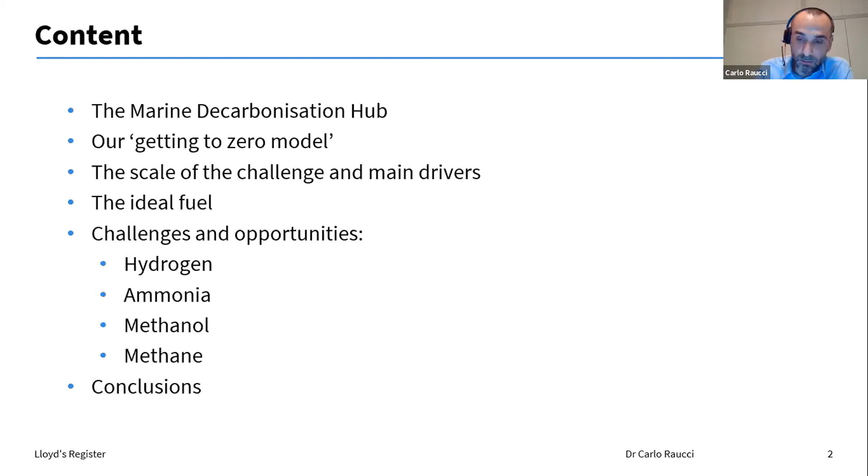The Lloyd's Register Maritime Decarbonization Hub has a clear mission. We want to accelerate the sustainable decarbonization of the maritime sector to deliver safe, technically feasible, and commercially viable zero-emission shipping by 2030.

And we want to do this, so we set some objectives. We will identify and enable a sustainable transition. We want to put in place a safety standard that will enable a safe transition. We also aim to build partnerships with first movers to innovate and demonstrate the route to scale. We want to build capacity for safe design and operation of zero-emission vessels. And finally, we also want to provide the right tools to enable decision-making.

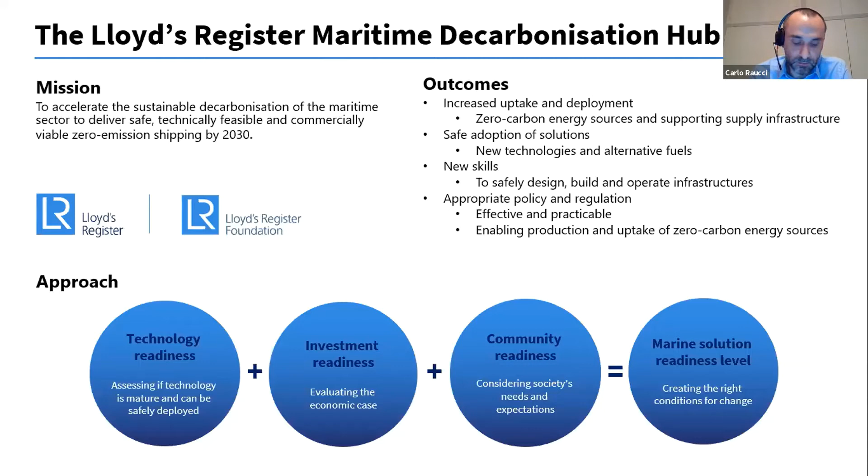In order to do so, we have established our own approach, which you can see in this diagram, composed of 3 elements in order to assess the marine solution readiness level. We aim to do this by assessing the technology readiness, the investment readiness, and the community readiness. We have actually translated this approach into a tool, which we call our Getting to Zero model.

The overall readiness, as you can see, we can put this diagram in a slightly different way to highlight the fact that the overall readiness of a solution is actually a combination of technology, community, and investment readiness. We aim to track the readiness of different technologies in order to assess the readiness of a solution. This model essentially can identify the bottlenecks of a marine decarbonization solution. We use this tool in the hub in order to focus our activities to progress the overall readiness of a solution.

So just to give a practical example: if we have a fuel that is technology mature, and there is a good business case, but actually a lack of safety standard for marine application, well, we are going to put our effort into establishing a safety standard in order to progress the overall readiness of such a fuel. So this is us, this is how we operate.

Now let's talk about decarbonization and understanding the full decarbonization of the shipping industry. As I said, this is very strongly connected to the question of why we need new fuels. Let's start with this graph, which shows essentially a potential decarbonization trajectory, with full decarbonization by 2050 or by 2070. In this representation, we also have highlighted the IMO ambition, which is the most important ambition of the IMO's initial strategy, aiming to reduce annual GHG emissions by at least 50% by 2050 compared to 2008.

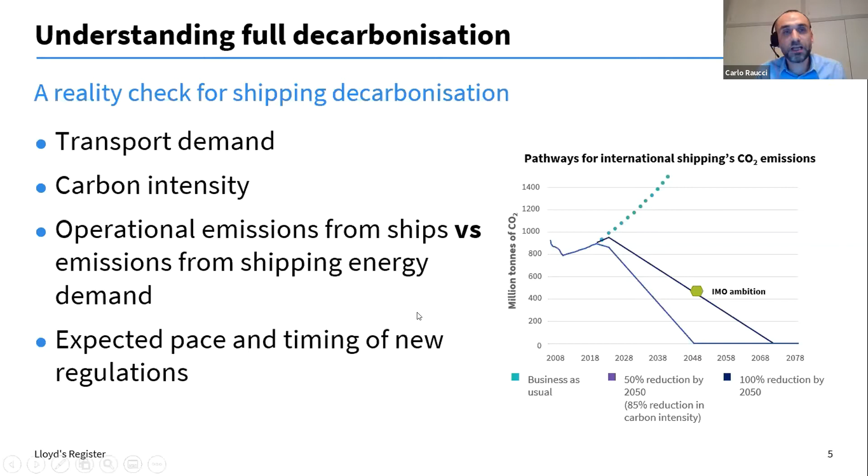I'm finishing with the whole supply chain, and I want to introduce the next slide, where I want to clarify what we mean by supply chain and why it's important to look at the challenges of full decarbonization in perspective of the wider energy system.

So we said it's important to have a contribution of low carbon shipping fuel, but where are these low carbon shipping fuels going to come from? We need to start from the feedstock, the resource to produce these fuels - coming from biomass, from electricity, from renewable energy such as solar, wind, or fossil fuel with carbon capture.

Then this feedstock will be used in conversion, in a production plant, any conversion system. At this stage of the supply chain it's also very important to consider other sectors that could compete for the same fuels - so the integration of the production with the demand of other sectors.

Once the fuel is produced, it will need to be distributed to a bunkering hub - hence the bunkering and the role of ports. Then the fuel will be stored on board, handled on board, and this has to be done in a safe way with crew trained for that. Finally, the fuel is used in propulsion, main machinery, and also auxiliary machinery in different types of propulsion systems. This is to clarify what we mean by the whole supply chain.

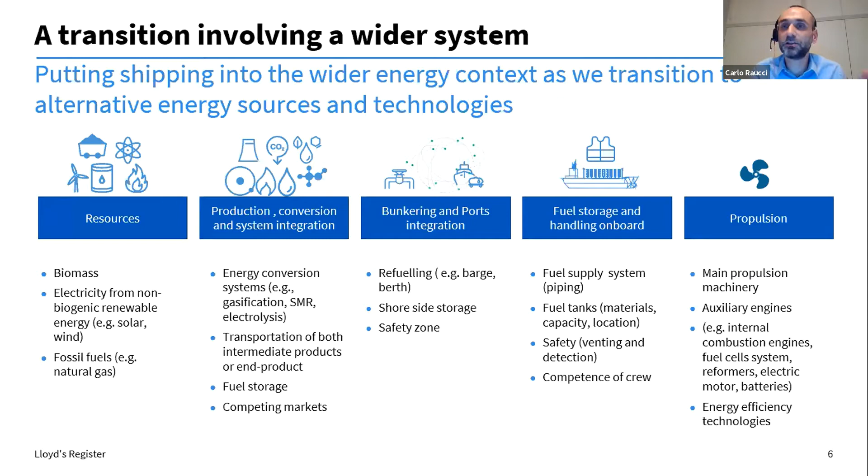Okay, we have identified the challenges. We know that we need low carbon fuels. We know that low carbon fuels need to be looked at along the supply chain. So now let's have a look at what might be the ideal fuel that will resolve the decarbonization of the shipping industry.

As you can see, I'm using the same structure as our tool, and I'm using this simplified template just for this lecture, just to make things a bit more interesting. But this is not meant to be complete. So the ideal fuel will have some...

Ideally, we want to have a fuel whose technology is mature. But also, we want a fuel that comes from sustainable energy sources - it should be produced from sustainable energy sources that have the potential to be scaled without compromising the sustainable use of the sources. As I said, the technology should be mature and scalable.

The storage tank, together with the characteristics of the energy density and the potential solution of the design, should guarantee that we don't have any loss of cargo capacity.

Ideally, the retrofitting of this fuel - say we have a current ship and we want to retrofit it with our new ideal fuel - should be easy. And also we want a fuel that is safe to use and handle, with minimal new skill and training required.

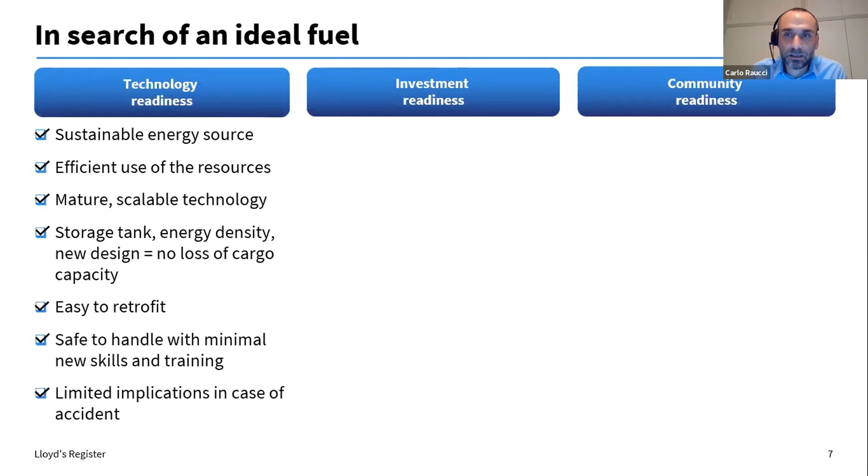And if there are some risks or implications in case of an accident, obviously we want those to be as limited as possible. This gives some technical characteristics of the ideal fuel. If we move on to investment, we also want a fuel that is competitive in terms of CapEx and OpEx, essentially the cost of production of these fuels. We want this fuel to be scalable in terms of infrastructure, with costs that are competitive.

Also, the capex of onboard technology should be affordable, and the overall final price we want should have low volatility, because it could be demanded from other markets. So we want a fuel that has low volatility, and low cost of retrofitting, so it has to be easy to retrofit, but also at low cost.

And overall, we also want a fuel whose business case is robust enough over time. So the TCO, the total cost of ownership of a fuel for the ship, which includes the capex, opex, and also the voyage costs, should be robust over time against the other competitors.

Finally, our ideal fuel will need to have characteristics that meet the acceptance of the community. If there is a disaster, we want the society to accept some risk associated with this fuel. Obviously, we want a fuel that, as I was mentioning before, has low or zero well-to-wake emissions.

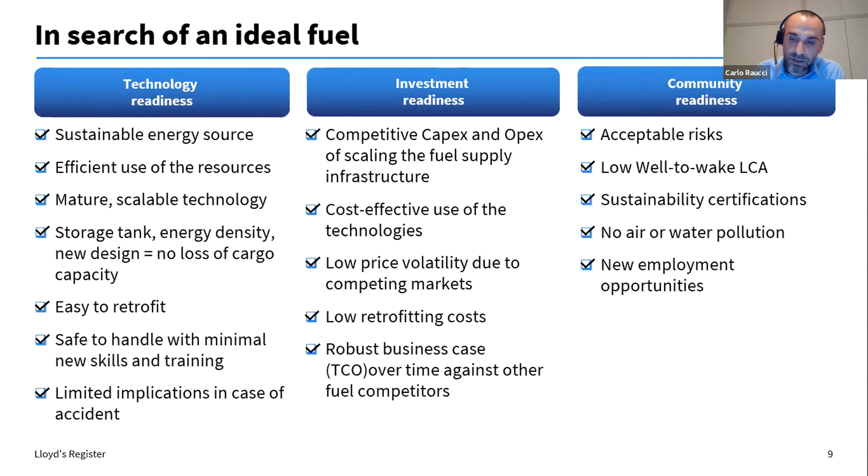But before going there, I just wanted to highlight that despite the title of this lecture, this is not only about technical issues. This is actually an issue that also involves investment and also involves the community.

There is a need to have a different business model. It's very likely that the shipping industry will not have access to a single fuel only for this industry, but there will be a fuel that will also be demanded from other sectors. So the whole procurement system of this fuel will have to change, with a different business model.

The investment is also, as mentioned, a very important parameter. Today, investing also means investing in adaptability, and this has to be based on the expected policy. So the timing and pace of the investment, of the regulation, but also the level of stringency of the regulation, will essentially set the relative competitiveness of fuels amongst each other.

And finally, it's also an issue that, as we see, relates to the whole supply chain. So it's not just shipping owners and shipping companies, but also ports, fuel suppliers, shipyards, and bunkering companies. So it's more an organizational challenge here, if you allow me to use that term, so there is a need to synchronize all these stakeholders.

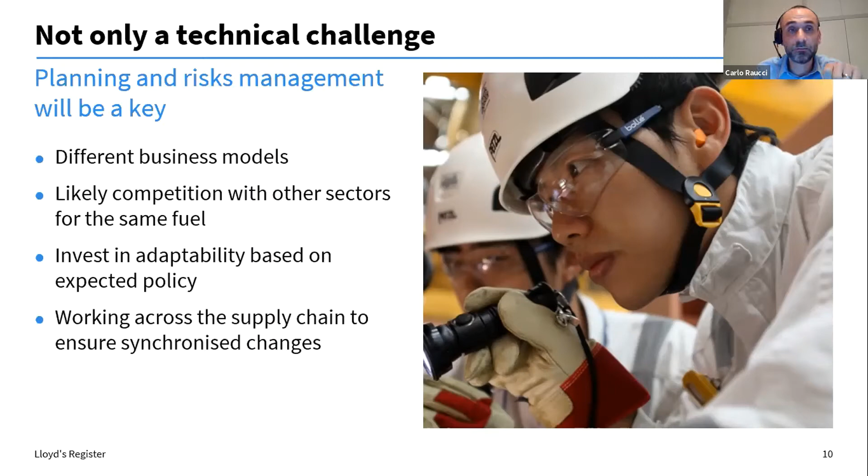Okay, so we now have the framework of our ideal fuel. I'm now moving on to assessing and zooming in on the challenges and opportunities of each fuel, and I will start with hydrogen.

So to start with hydrogen, I wanted to focus on the fact that we are talking here about transitions, so a transition based on hydrogen. And whenever we talk about transition, we need to take into account that we have a time dimension, so we have decisions to be taken today, in one year, in five years' time, and so on. This slide is actually an attempt to emphasize that the hydrogen solution has to be put in the context of a transition towards hydrogen.

So today, obviously, you cannot really operate a hydrogen ship, so you cannot really use that. So the decision of today is actually using fuel oil, or you can blend it with some biofuel or LNG.

And then there will be an era in some years where there will be diversification and hybridization. So in the case of hydrogen, we may see dual fuel with blue hydrogen, but also some ships that run on 100% biofuel, or some blending with LNG. And after this era of diversification and hybridization, where it's likely we'll see a bespoke fuel supply developing...

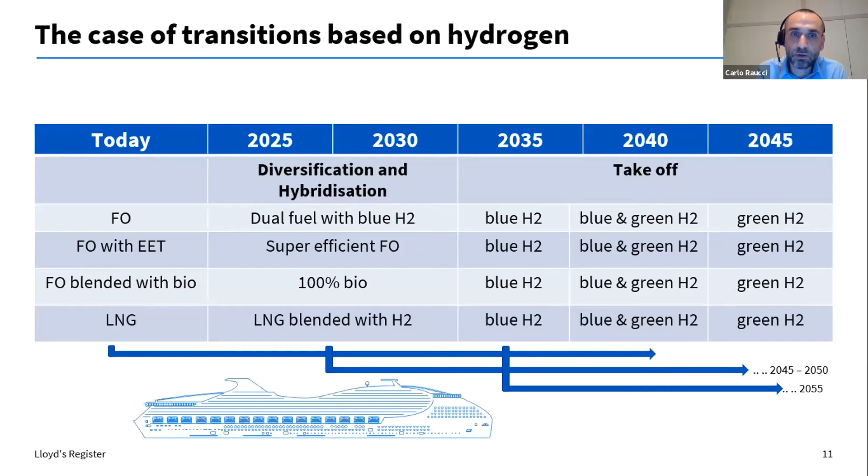I mentioned blue and green hydrogen, but I have not defined that. So now let's zoom in a little bit more on hydrogen and its production methods, the fuel characteristics, and obviously the key challenges and opportunities for marine application.

So, production methods - how we can produce hydrogen. You can Google this, and very quickly you will realize that there are many types of diagrams showing how you can produce hydrogen in many different ways. I have selected this one from the Royal Society, which I think is very nice because it highlights the resources, where they come from, the energy conversion, and also the potential application.

As you can see, you can produce hydrogen from renewable energy through biological routes or electrolytic routes, and I call this green hydrogen. And then you can also produce hydrogen from fossil fuel with CCS, which I call blue hydrogen. So as you can see here, hydrogen can be used in different sectors, not only shipping or transport, which is also a key element in terms of wider energy transition.

Let's have a look now at the fuel characteristics. So one of the key elements to assess a fuel is looking at the gravimetric and volumetric energy density. Hydrogen has a very high gravimetric energy, which means energy per kilogram of fuel, but it scores very low in terms of volumetric energy density.

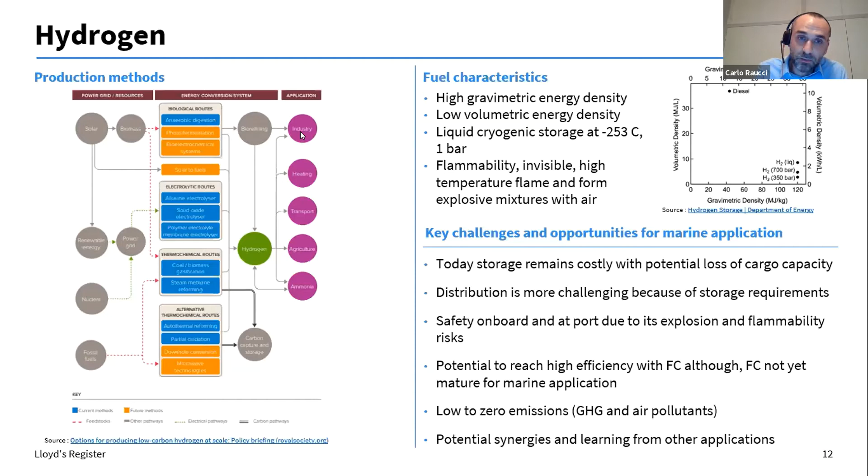So that's hydrogen. Now I want to use the framework of our ideal fuel to see how hydrogen compares. What we can say is, in terms of technology readiness, if it's green hydrogen, it actually uses sustainable energy sources.

Obviously, there are some elements in the production of hydrogen that are not very mature, but the technology is there and known, this is not a lab stage. But when it comes to investment readiness, there is a lot of question to answer because there is quite high cost related to the storage of fuels.

The business case of hydrogen on board ships is not quite robust. But in terms of community readiness, it has got great potential in terms of emissions, GHG, and air pollutants, and many countries are actually looking at this option. So there's quite a lot of interest and acceptability of the community, and I would say there is reason to be quite optimistic around that, although hydrogen safety is something that remains to be explored a little bit further.

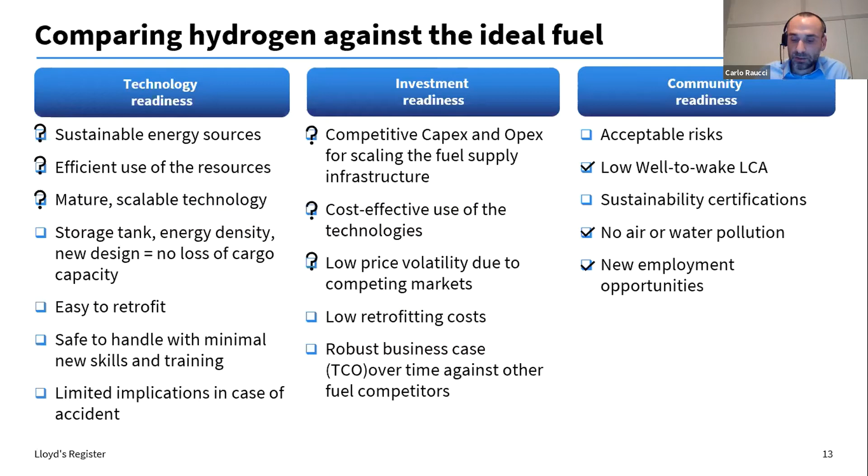Let's move on to ammonia. I would use the same structure for each fuel. You can see we are talking about a transition based on ammonia, very similar to hydrogen. There are some options here that don't have a lot to do with ammonia, because you can't really operate on ammonia today. But in the era of diversification and hybridization, you can start to see cases of dual fuel, or cases of using ammonia in LNG ships.

This also depends on whether you are building an LNG ready for ammonia, which has some implications in terms of cost, but it's a route that is possible. Eventually this transition will bring you to a takeoff era where you will likely use blue ammonia, then a mix between blue and green ammonia, and then green ammonia, which is very similar to the transition we have seen for hydrogen.

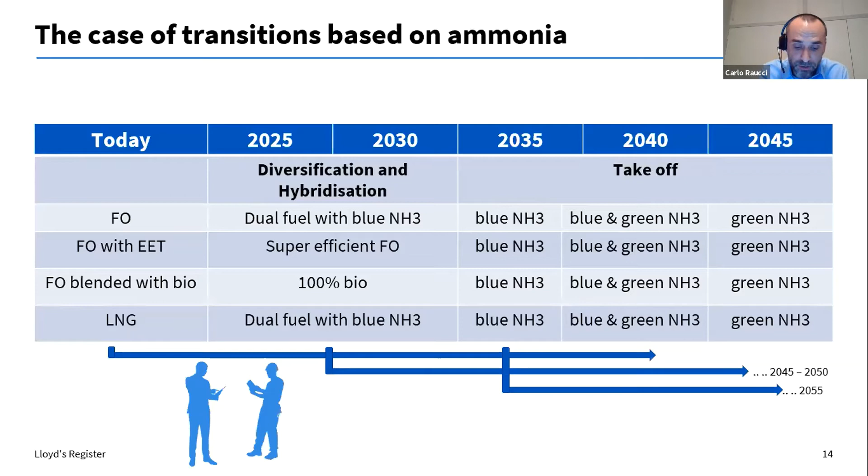So ammonia, let's zoom in a bit more. There is no ammonia without hydrogen, so the key element of ammonia is actually hydrogen. I'm using another diagram from Royal Society. As we have seen now, we have only one way represented to produce hydrogen, but we know from before that there are many ways to produce low carbon hydrogen. Hydrogen is combined with nitrogen obtained from the separation of air, and then using the Haber-Bosch process in order to produce ammonia.

Ammonia is today used mainly as fertilizer, but has also got other potential uses that are not only for transport, but also some other potential applications.

In regards to its characteristics, ammonia has a low gravimetric energy density compared to hydrogen and diesel, and there's also a low volumetric energy density, so it scores a little bit low. But the fact that, relative to hydrogen, the volumetric density is a bit better than hydrogen means that instead of needing a tank that is 4 times bigger than marine diesel, you actually need a tank that is roughly between 2.8 and 3.4 times bigger than MGO.

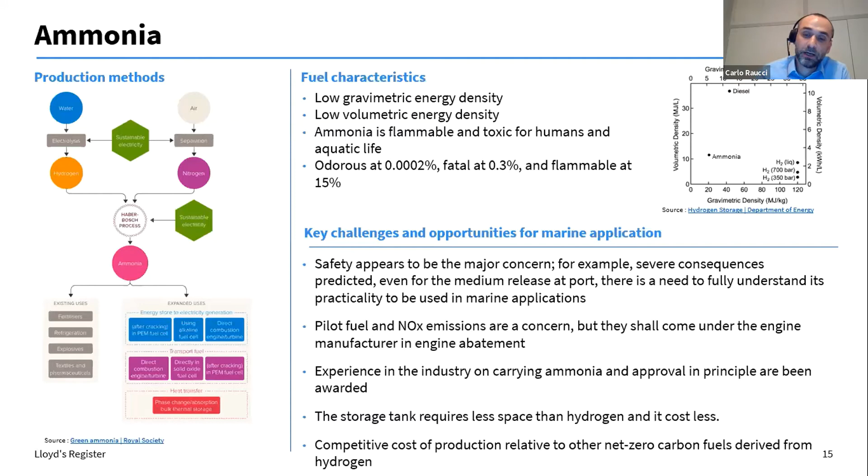As I said, the storage tank requires less space, and one important thing about ammonia is that compared to other low carbon fuels, it has a competitive cost of production, which is obviously an important parameter. So let's see how ammonia scores against our ideal fuel.

In terms of technology readiness, it's very similar to hydrogen because you can use a sustainable source and scalable technology. If you use renewable energy, it should be okay, it really depends on the sources you're using. The storage tank in combination with energy density needs a new design. There's obviously some concern about losing cargo, so you are losing some, but it's better than hydrogen.

In terms of investment readiness, as I mentioned, there are reasons to be optimistic about the overall business case, but there are a lot of questions about how this fares against competitors, which needs more exploration. Finally, in terms of community acceptance, it's perhaps a little less because of concerns around air and water pollution, and as we said, whether it's safe for use on board ships. So acceptance of these fuels really relies on more evidence being produced to show the fuel can be safely used in marine applications.

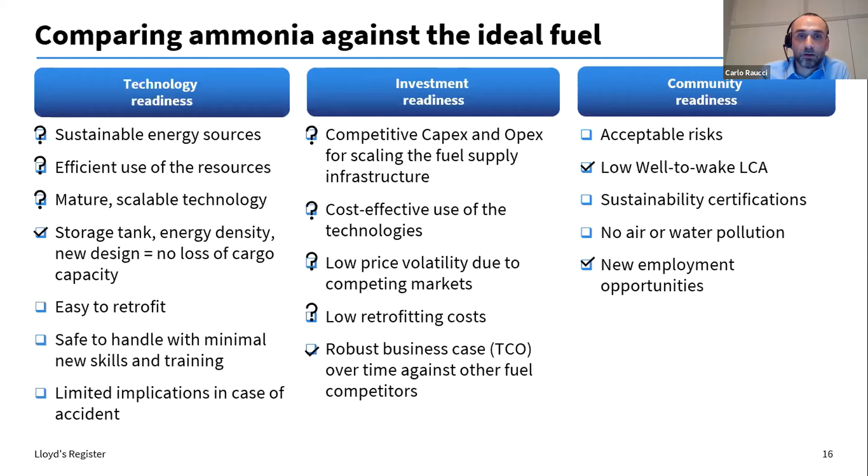Okay, I think I'll need to go a little faster. This is the case of transition based on methanol, which is a little different from ammonia and hydrogen. You actually have options to use methanol right now: blending with biomethanol, or even using 100% biomethanol. In the first years, there's some blending of bio and blue methanol potentially happening, or dual fuel, then a mix of bio and blue methanol, and then take-off of blue and green methanol in the long term. That's quite interesting because it suggests more flexibility in the short term for using this type of fuel.

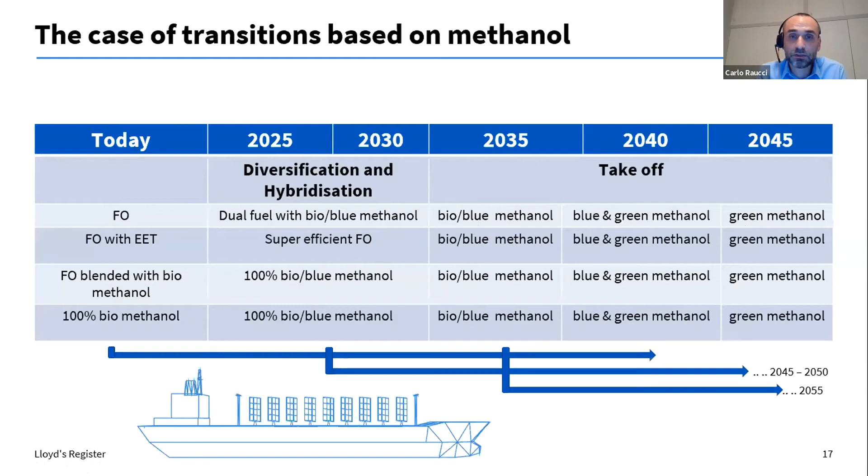One thing I want to highlight is that there are different types of methanol, and I like this diagram from IRENA where you can finally see the green and blue, but also the brown and gray methanol. This is a reason for concern, because if you're using methanol today, you really don't want to use this type, as it could actually emit more emissions than fuel oil.

If we look at the fuel characteristics, it's actually very similar to ammonia. It's got a little better volumetric energy density, which means in terms of space requirement you will need... let me see if I can find this quickly... about 2 to 2.5 times bigger tank than MGO, which is slightly better than ammonia. Also, its toxicity seems more manageable relative to ammonia.

So the main challenges and opportunities: obviously there's a regulatory framework for methanol already being established, and the fuel is competitive, but there's a lot of uncertainty around the cost of production in the long term. Methanol's future-proofing is heavily dependent on the supply of renewable CO2, and therefore on technologies such as direct air capture. On the other end, methanol could support an efficient transition, since you can go from bio, to blue, to green, although we should discourage the use of brown, gray, or non-sustainable biomethanol.

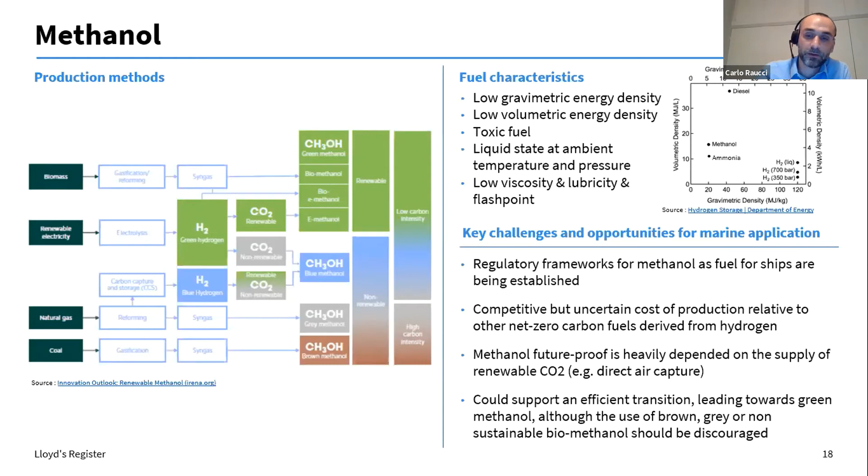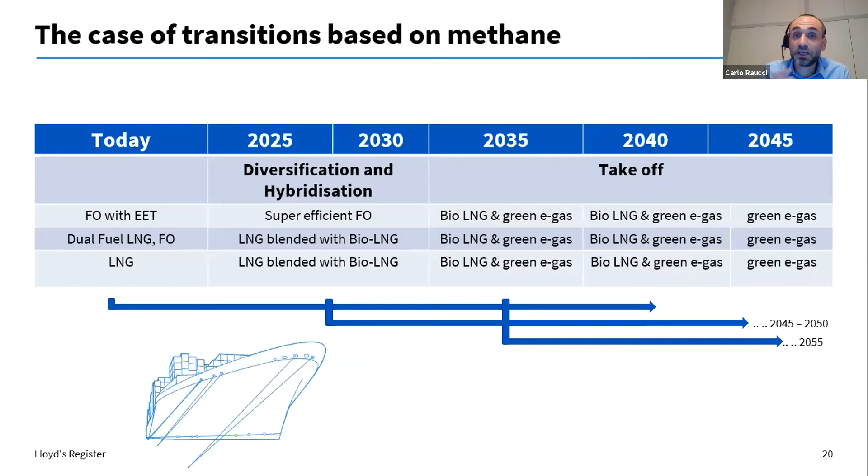Very quickly on methane, another transition pathway based on methane - so we're talking about gas. You can start with LNG, then move to LNG blended with bio-LNG, and then in the long term a mix of bio-LNG and synthetic LNG. This is the production of gas - I chose a diagram this time from CE Delft where you can clearly see the production of bio-LNG and synthetic LNG. Once again we have our good friend hydrogen here, which we know can be produced in many different ways. One thing to highlight is that once you've produced methane, you also need to liquefy it, and this adds extra cost.

In terms of fuel characteristics, it scores a little better than methanol and ammonia in terms of gravimetric and volumetric energy density. This means we'll need a tank about 1.7 times bigger relative to MGO.

There is some complexity around how we store LNG, but this has become something we have a lot of experience with now, actually storing LNG on board ships. And this is one of the key opportunities for these fuels, which also have a very strong training program already in place.

But if we look at the challenges, the main challenge for this fuel is actually its significant risk in the mid to long term, because there is a potential concern around the capacity and scalability of bioenergy, and the risk of locking in a long-term option today.

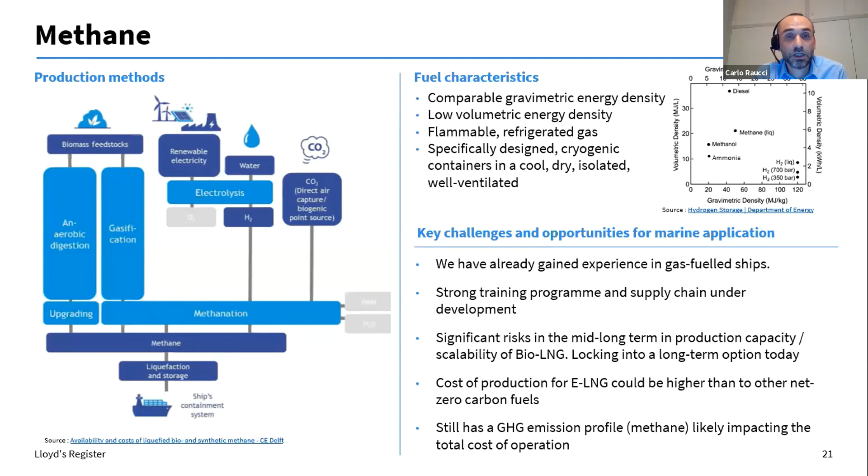So in terms of scoring against our ideal fuel: technology-wise, this is a mature technology. For investment, there are a lot of questions to answer about the long-term capacity to be competitive. And for community, I would say there is some concern about the sustainability and the emissions in terms of CO2 and methane slip.

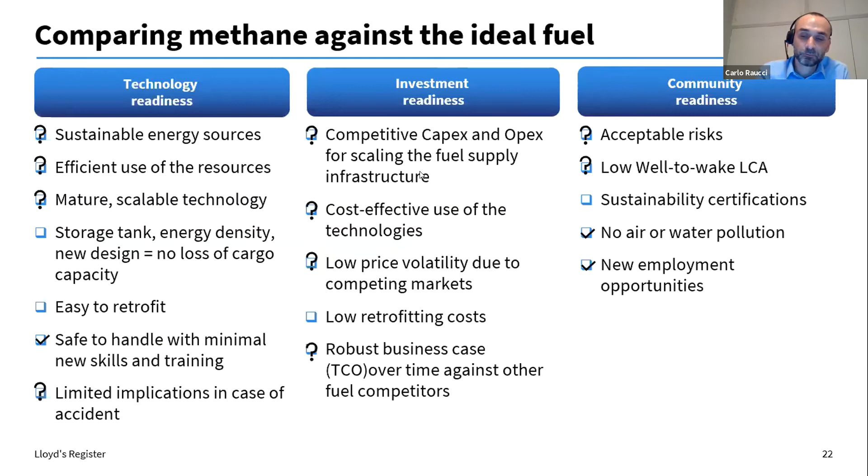That's my highlighting of the challenges and opportunities for each of these fuels, looking at the transition and the whole supply chain.

All of these transitions are not meant to be complete or exhaustive, so there could be other transitions in there. There could be a transition based only on biofuels, although we know there are some concerns around the potential scalability of this fuel, but also other options like nuclear or CCS on board, which I have not mentioned in this lecture, but just to note these are other options that could actually play a role.

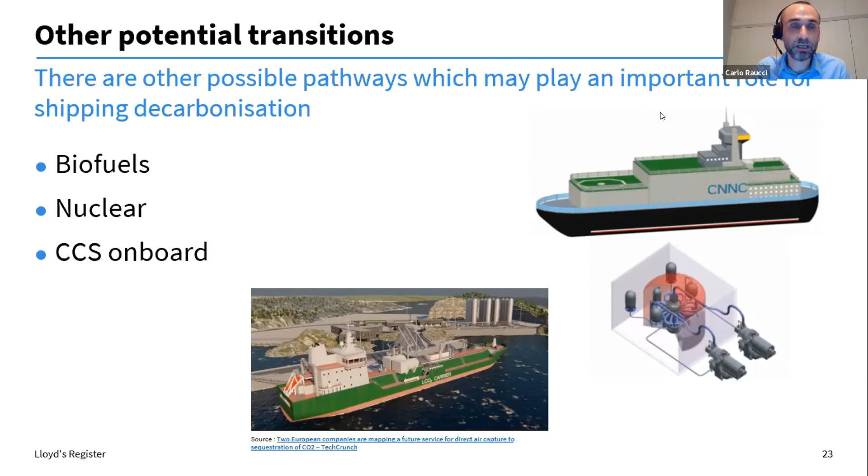And finally, I'm going to leave you with three points as conclusion. As I said, I'm not going to say that any one of these fuels is better than another, but one thing I guess we have learned is that there isn't an ideal fuel.

But multiple possible transitions are actually possible. When we look at the transition, this means that the fuel will change in terms of carbon intensity and price, but nevertheless we are confident that there are possible, compatible transitions to achieve our goal.

Another point is that we know there are different challenges and opportunities with all fuels right now, but we do need to have a mid-to-long-term perspective in order to assess each fuel. And finally, given the risk we are exposed to, investing in flexibility today could be a good point, but with a robust decarbonization strategy for tomorrow.

That's my three conclusion points. I'm going to stop here. Sorry, I probably didn't leave a lot of time for questions, but happy to answer any now.

Okay, thank you, Carlo, for a very interesting lecture. Whilst everybody's thinking of their questions, we have one already on the Q&A, so I'll read it out: do you believe that small craft fuel selection will be determined by what is available rather than what is best suited to its application?